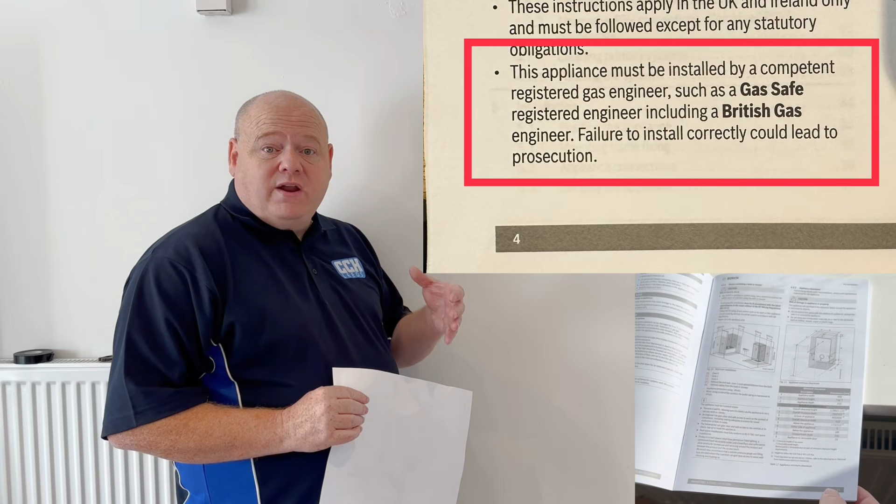So this is the first Worcester Bosch boiler that I've installed in a lot of years. Yesterday I spent between 4 and 6 hours going through all the installation instructions, and there was something that I wasn't sure about, so I actually phoned Worcester Bosch just to double check. So it's very important that you make sure you know what you're doing before you start. My advice would be, if you can, go on the manufacturer's training courses, and then when you start installing those boilers, you'll be installing them right from the start. That's my opinion.

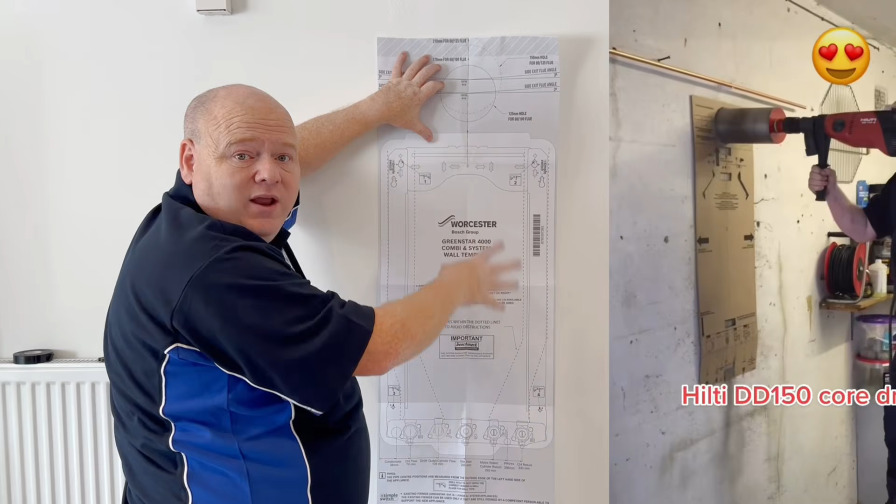So I've got the template here. I'm going to put the template on the wall. One thing to point out: if I was going to do this in a customer's house, I would mark this template up, and then I would core the hole out for the flue first, before I put the jig on and before I do any of the boiler part of it. You won't want to get all that muck in your new boiler, bits of rubble inside the flue and all that. I've seen that happen loads of times.

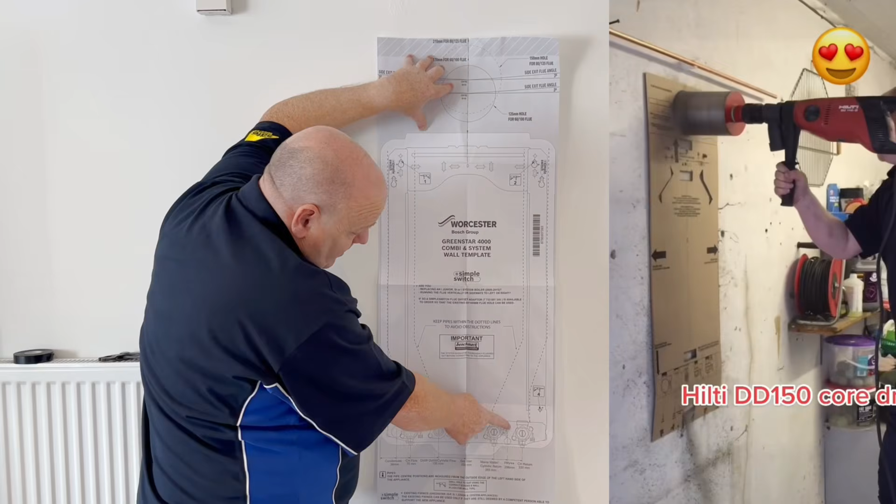So I'm going to put this jig onto the wall. One thing with this Worcester Bosch Greenstar 4000 as well, the pipes can go up the back there. But we'll have a look at that later once we've got the jig on the wall. So what I'll do now, I'll mark this up and we'll get the jig onto the wall.

So I've got the template on the wall now, and as you can see, you've got a picture of your flue on there. So you can mark the centre for your flue, and then you can core your flue out, remembering you need a slight angle on there. You'd have to refer to the installation instructions, and I think we said it was 52mm per metre. So depending on the thickness of your wall, you'd have to work that out, not guess, work it out.

Also, on here you've got all your fixings. So before you've got your boiler or your jig out, you can drill all the fixings. There's a lot of fixings as well. So if you've got a bad wall behind, you've got a better chance of getting a good fixing. I think that's really good, to be honest.

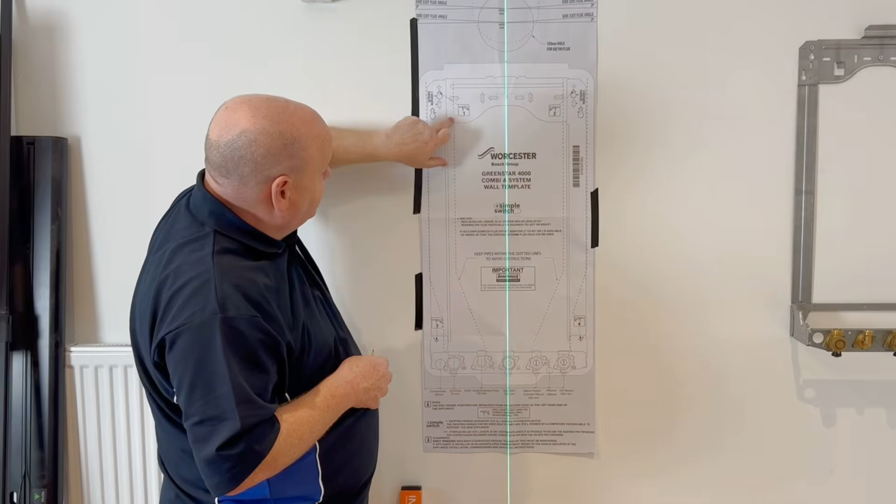And then if we look down here, you've got all your valves, and there's also a centre line on there. So again, you can get a pencil, mark on the wall, mark for your clips. So you can make all the mess before you even put the boiler on the wall.

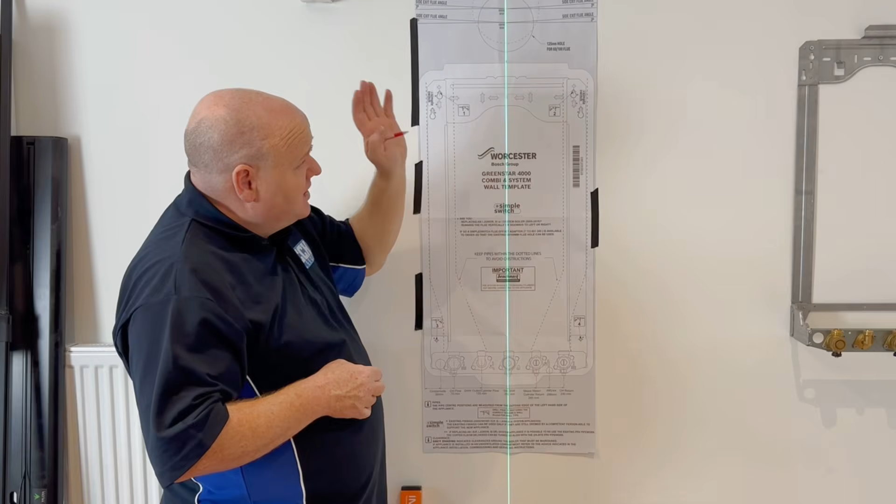So what I'm going to do now, I'm going to drill some fixings. I'm going to move that jig and put it onto here. I'm also going to put some clips on the wall, put some pipes down and do a bit of soldering as well today, because I've run out of press fittings, so I'll have to use some soldered.

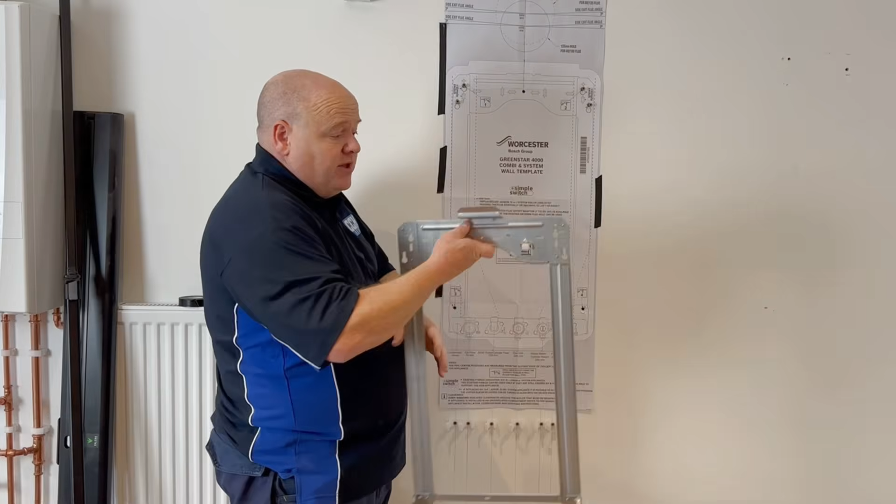So I'm just ready to take this template off now, but I just thought I'd show you before I did. The screws, I've put some of the screws in. Some of these screws are like that so that you can just click them on, and then there's some that are just fixed so that once you screw them in, obviously the jig won't come back off. And I've also put the brackets on below, so I can tidy up, take all this off here now, and then we can get it all piped up.

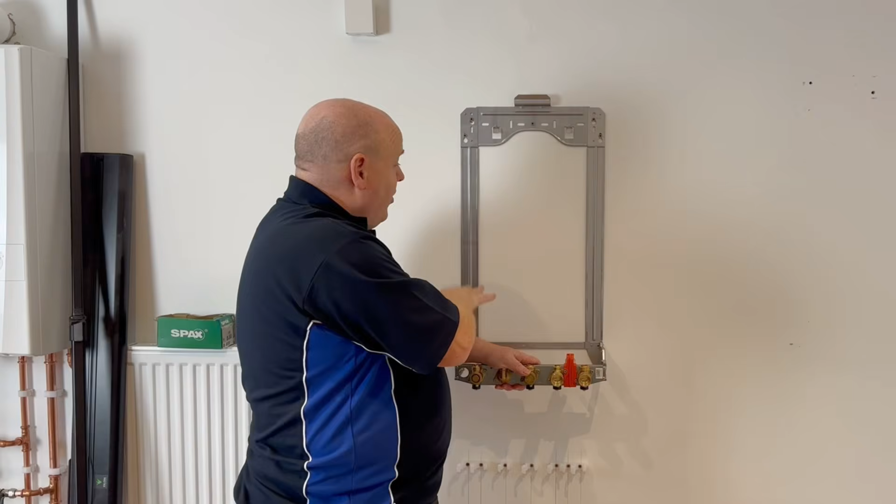So that's it now, that's the jig on the wall, and I've just got to pipe it up now. The PRV is on the front on this boiler, but the connection is here. So that's got like this fancy clip here. So what you need to do, you need to pipe this up first, and then you take this red bit off, and then you'll click your boiler onto it.

One thing I like about this boiler and the previous boilers that we used to install years ago is the tails on the back, they're not fixed. So you can put whatever length in you want. So for Talon clips, I would normally use Talon clips. They'll go straight in. You cut that to whatever the distance is, and I can't remember off the top of my head. We'll find out when we come to pipe it up.

But say for instance you've got a pipe, one of them's going to go this way. You can just cut this one a little bit shorter, if that makes sense, and then just take it straight over. So it just makes it a little bit easier, especially if you go into a job where all the pipework's all over. With this, you can cut it and adapt it how you want. When you've got fixed tails on a boiler and you have to connect onto them, sometimes it can be more difficult. So I like that about this. But as I say, we'll pipe this up now.

So I've started to put the pipes on there now, and I'm just going to measure the distance from where the elbow is going to be to the front of the boiler, so that I can cut all the little bits for the pipework.

One thing just to point out on this PRV here, it's just a little bit too short to go straight in. Now, there may be a reason that they've done that,

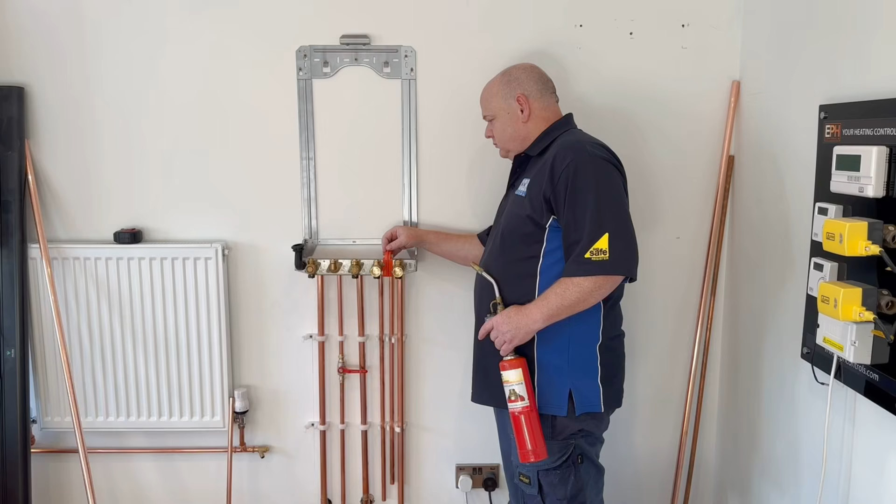So I've started to solder some of these now. What I've done with the PRV, have a look there, I've just put a street elbow in and a socket, and that fits in perfect. So for anybody who's going to be installing these, if you get a street elbow and a socket, it fits perfect, and it still fits in your clips, so all okay. So what I'll do now, I'll just finish off this soldering, and then we'll get the boiler up on the wall.

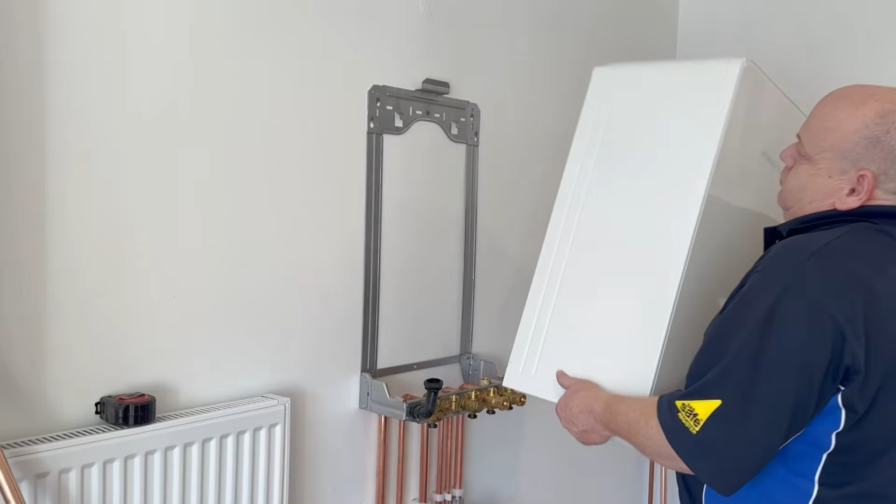So that's the boiler on the wall. So as I've said already, this is a Worcester Bosch, and it's a Greenstar 4000, and it's a combi boiler. This is a 30 kilowatt boiler that we've got here. This boiler will not be a working boiler in this property. I've just installed it for the purposes of this video and doing this review for you.

If we have a look at some things on this, we've got a central heating filter on here. So I would advise always to flush the system when you install a new boiler, and also check that with something like an Adey ProCheck. Personally, I would use the Adey ProCheck.

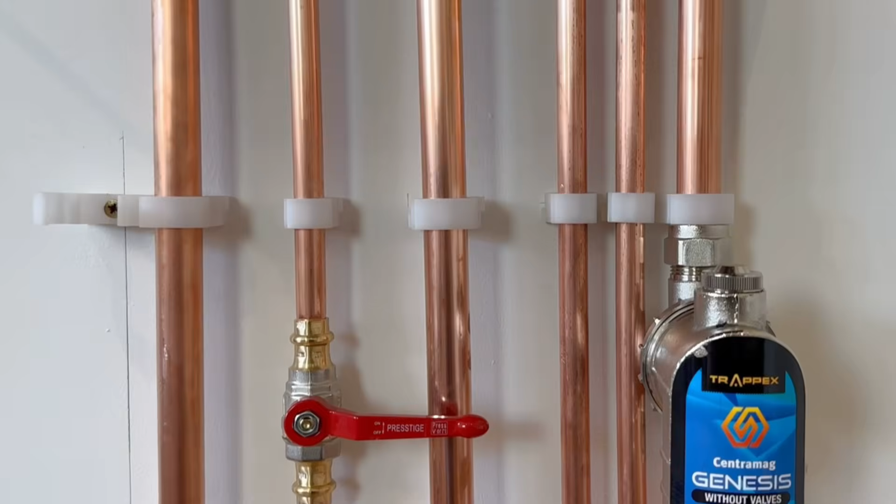And if we look at the pipework below, you need to have a minimum of 600mm of copper pipe before you go to plastic. So if you're going to put Speedfit pipes on or out like that, you need to have a minimum of 600mm before you do that.

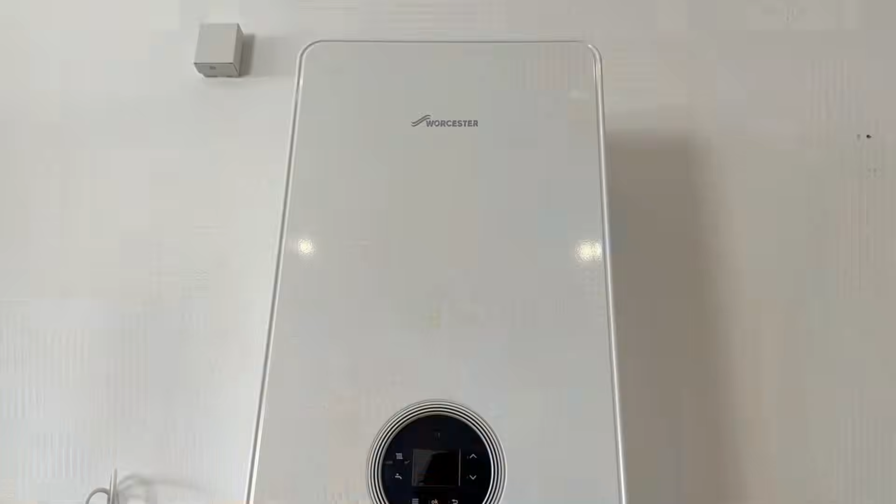Also on this, we haven't got a scale reducer on here. As I say, this isn't going to be a working boiler, but we're not in an area that would need one anyway. But again, you would need to check your area and see if you need one of them on there. I'm going to finish off the pipework at the bottom afterwards, but I'm going to clean the boiler up first.

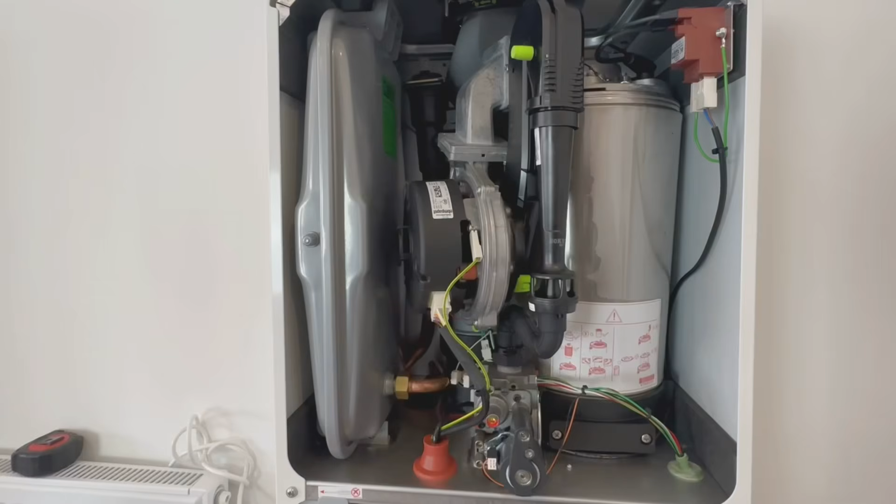So to take the case off on this boiler, there's just 2 screws underneath, so a massive improvement to some of the other models of boilers. It's got insulation on the inside, so that's going to help with soundproofing. And then obviously inside, expansion vessel at the front, Schrader valve at the front.

One thing I do really like about this boiler, it's got a big pipe on the expansion vessel. So a lot of boilers, it's actually the pipe to the expansion vessel that blocks up. So that's a real big improvement. This looks very similar to some of the older models, does the heat exchanger. It's probably a slightly different heat exchanger, but we'll look at that maybe on a different video.

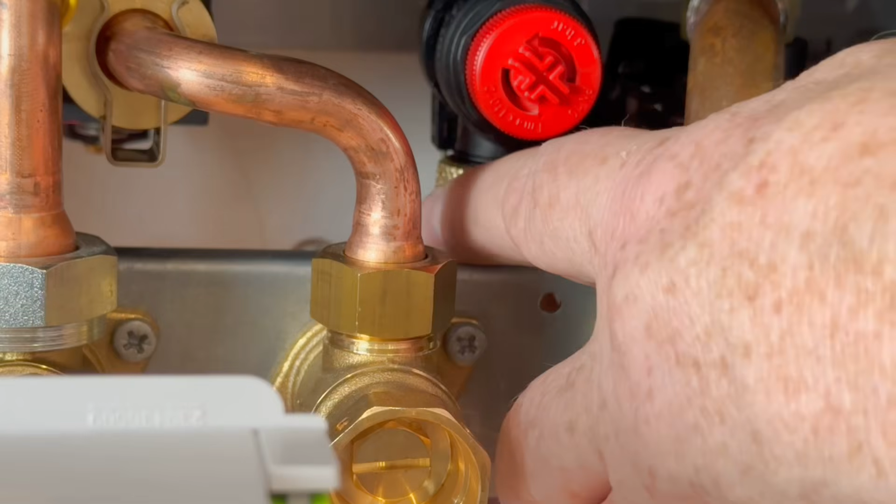Gas valve forward facing, so you can get onto connections a lot easier than previous models. So if we just pull these 2 clips in here, then we can just connect these pipes up, and we can install the condensate trap as well. And then we'll have a real good look at this boiler once I've connected it all up. Just connecting PRV up.

I will warn that was a little bit awkward, and it is a little bit awkward. It's not actually quite as bad as what I expected from what I've been told. But I'm just going to put all washers on here now, tighten all this up, and then we'll fill the boiler up. Yeah, we'll have a good look at it.

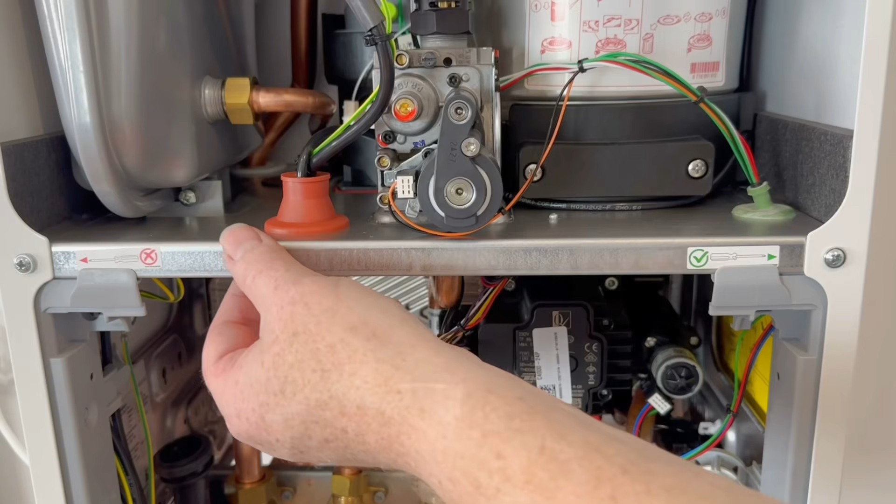One thing to point out on here as well, no sharp edges. Also on this, you can use this as a tray. You would need to be careful, but you can put all your washers and stuff on there. There's also some little holes in there, so you can put your screwdriver in when you're working on it.

One issue you get with boilers that have got a digital display is, as an installer, when you're filling it up, obviously you've no power on yet, so you don't know what the pressure is. But Worcester have put a manual pressure gauge on here, and this is inside the boiler. So this is really only for the installer. So that's a good little touch, really.

It's also got the drain off behind here, like we've had with previous Worcester Bosch models, which is, the drain off on these is really good. And then to get to it, you can just clip this pressure gauge just out of the way, nice and easy. And then you can get onto that with your hose pipe, just like you could with previous models.

Obviously turn that round, and what I've just learned recently is you can actually turn them and get them to come out, which I didn't actually know, and I've worked on boilers for years. So it just goes to show that every day is a school day, and we can always learn. And this is why I would always recommend that everybody goes on any training course you can and try and further your knowledge. Even if you've been doing this job a long time, personally I would say if you go on a training course, you're almost definitely going to learn something on that day.

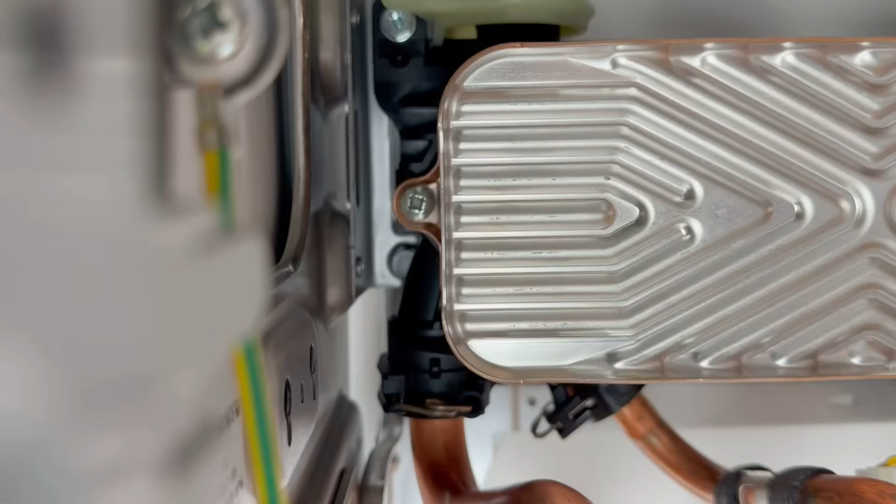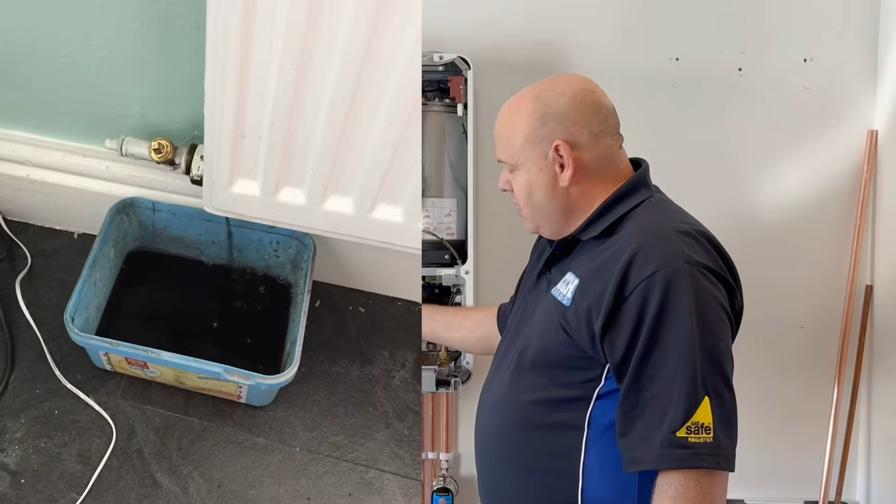And if we look inside the boiler here, we can see we've got the plate heat exchanger, and this is so easy to take out. It's just got one screw there, and that would just come out. Obviously you'd be turning water off and all that type of stuff. But we know that a lot of boilers get installed on dirty systems, and all boilers have problems with plates, and that's nearly always, in my opinion, down to how the boiler was installed to start with. But Worcester's made it quite a lot easier to get the plate heat exchanger out.

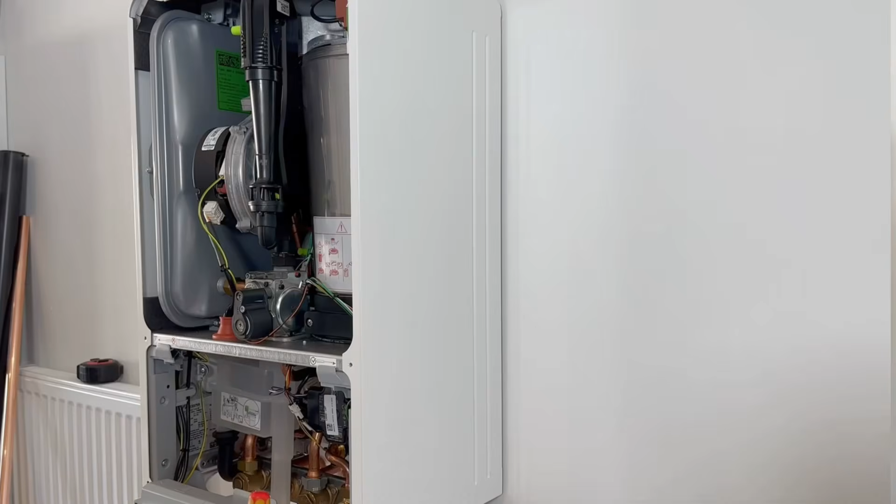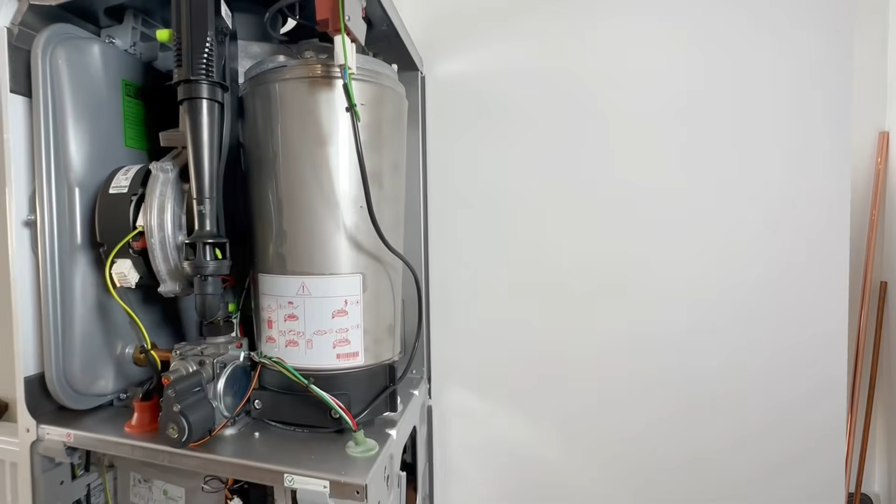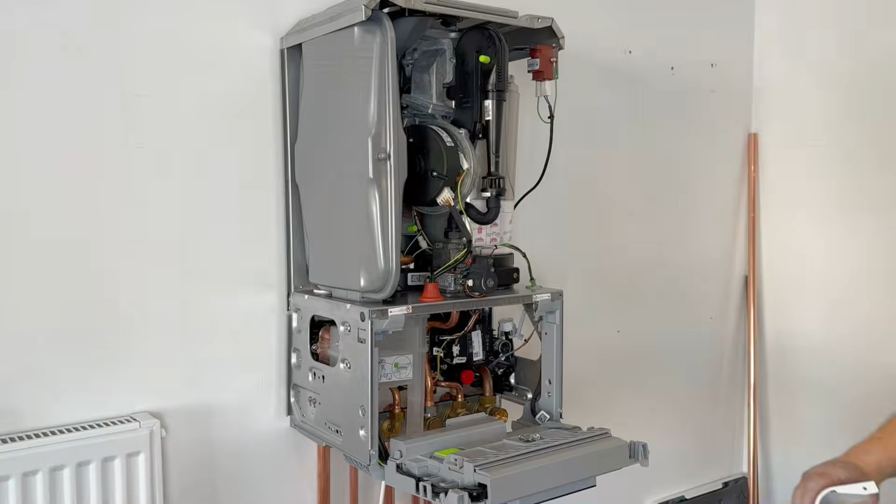Obviously on this you'd have to take the condensate trap out, which is what I'm going to connect in now, and then we're going to have a look at the display on front. Just before we put the power onto it, I'm just going to take these sides off and just show you. So these sides, they just slide straight forward, and then you can get all the way in to the side of the boiler. And again, we'll do that on this side as well. So then you've got quite a lot more space in there, with both sides off.

To be honest, a lot of time it might be in a cupboard, so that might not help, but you can get all the parts out on this from the front. The expansion vessel, once it's drained down, you just undo that there. That can slide out. It's got a little screw up there. This slides out. And again, you can do all this from the front as well.

It's also got a large condensate trap on this. So it's a 500ml trap. So it's said to help with freezing. So hopefully the boilers will not freeze as much in winter. You'd still have to protect your condensate as per the installation instructions as well.

Another thing to point out on this boiler, it's now got a pressure sensor, which means that if there's no water pressure in the boiler, then it will give a fault code and the boiler will not work. So that'll be something for you to be aware of, because you will have to top the pressure up. And leading on to the fact that for this boiler, you can also get an intelligent fill, which will mean that it actually will top itself up. So they've sort of solved one problem, made another problem, and then solved that problem as well, which is good.

One really good thing with this boiler is it will modulate down to 3 kilowatts. So for me, this is really important, because some boilers will only modulate down to like 6 or 7 kilowatts, and if you do heat loss calculations for a lot of houses, you'll find they only need 7-8 kilowatts to heat the house. They might even be lower than that. And that's at the deepest, darkest winter at -3 outside. So what that means is that in the middle of the year, or when it's just starting to get to winter, your house might only need 3.5, 4 kilowatts to keep warm. And this will modulate down to that, which is really good.

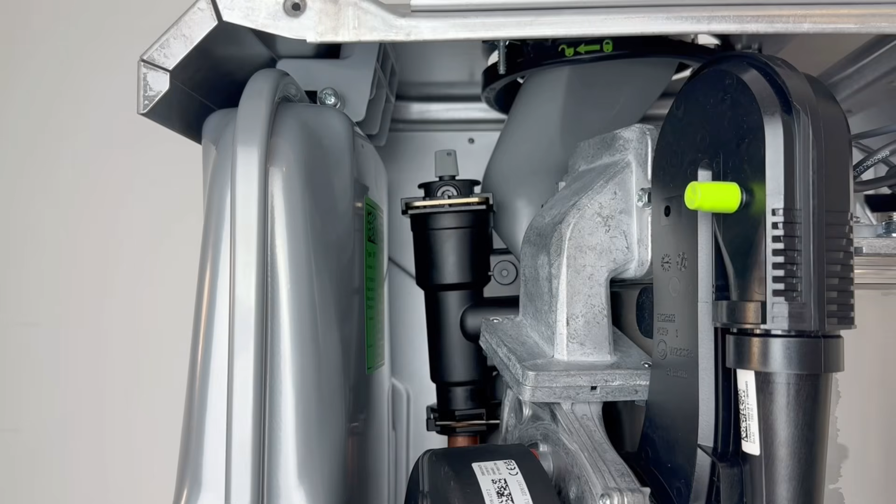One thing I like on this is that it's got an auto air vent, and it's on the top of the heat exchanger. When we go to most boilers, they're on the back of the pump. So for instance, if you've got a boiler that's up in a loft, your heat exchanger is actually where all the air is. So then it can cause problems with the heat exchanger. And this is with a lot of brands.

Years ago, Worcester used to have auto air vents on top, they even used to have filling points on top when it had an old open vent system where you could come in and fill from the top. And it meant that the heat exchangers were always full and there was never any air in the heat exchanger. But having that there is, in my opinion, a big improvement as well.

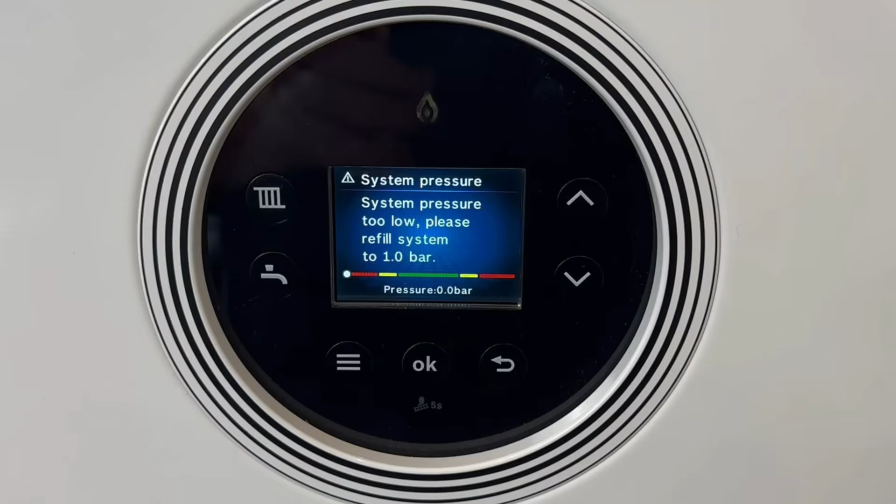So yeah, auto air vent. I put the case back on the boiler now and it's showing a fault code as low water pressure, which is something quite unique, and it's a little bit funny with a Worcester, because I'm not used to that. We've not had that for a lot of years. So yeah, we've turned it on, so it's got the fault code on.

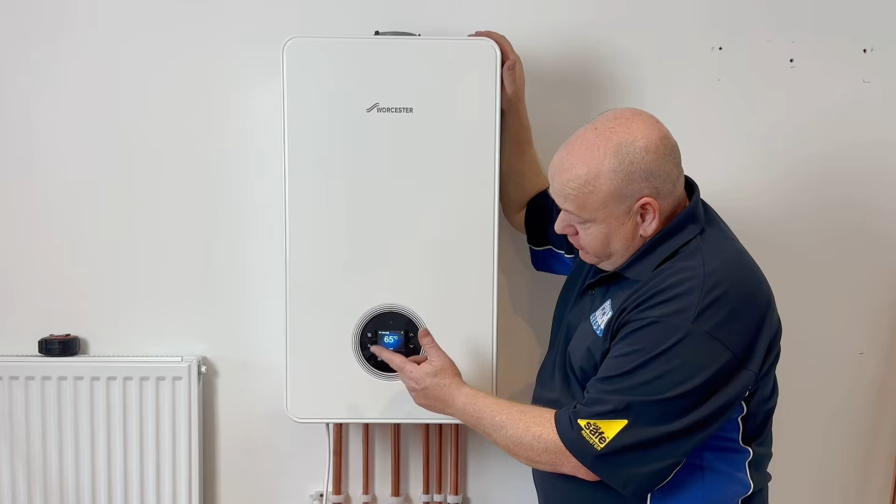Interestingly, it comes set at 65 degrees for the heating, and the lower we have that heating temperature, the more efficient the boiler is going to be. So that's probably just to gee people up to have it a little bit lower. If you install these for customers and they're used to having radiators really hot, then you may need to turn that up. Really though, what you want to try and do is educate the customer to have the heating on for slightly longer and have the temperature lower.

Another thing with this boiler, they do come with smart controls and they just plug in underneath, which makes it quite simple to install. I think I'm going to do a full video on this front display, a separate video. I'll fill the system up. I need to get a filling link as well because I didn't get one when I got the boiler.